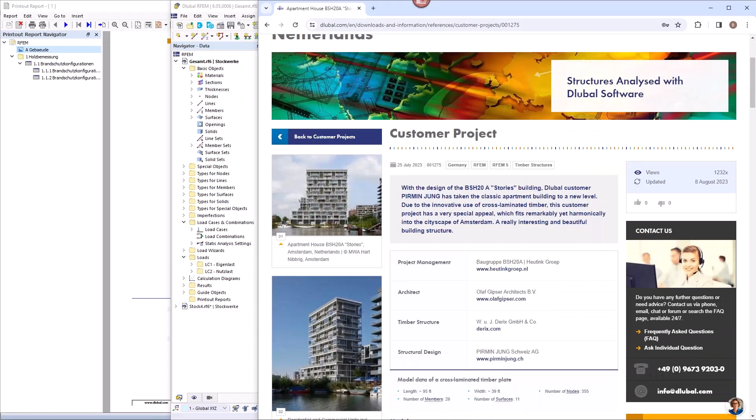The static analysis has been done by the engineering company Pirmin Jung. They're using our software, yeah, that's the key. And this is the building, 13 stories.

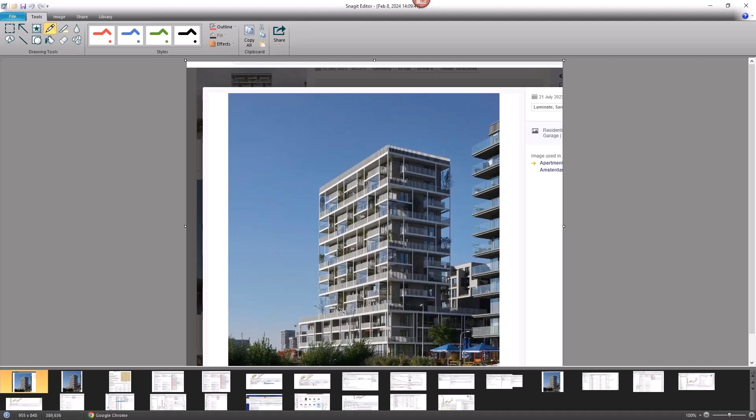The point we want to take a look on today is that there is, or what makes also the building quite interesting, is that there's a smaller part that is upon the bigger part, and we want to take a look on this story 3 here.

So how can you do this? Now you can first of all make it with model it 3D and regard all construction analysis, stages analysis, all this stuff in the 3D model, or you can model it 2D, and then you have to connect each story via the option load transfer. And this is the option that I'm choosing here today.

Today, I'm only looking for vertical deformation forces. I'm not looking for horizontal forces for the stiffening of the system. I want to do this in a separate webinar later this year. Today, only vertical deflection and vibration. So wind load and earthquake we will not consider here today.

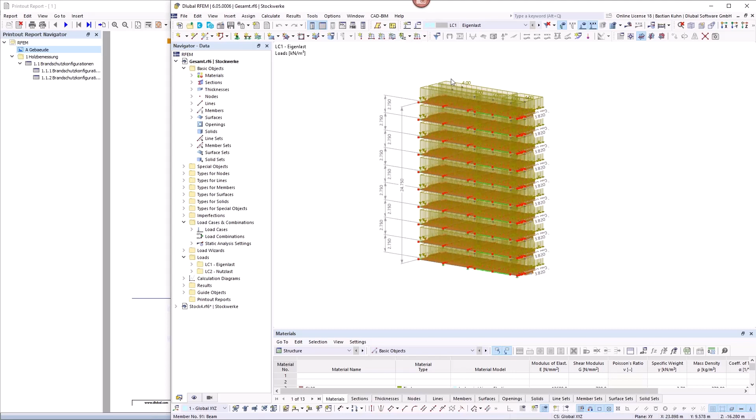As I said, I want to calculate that in a 2D structure, but with 3D effects. Therefore, just to give you an imagination of the structure, I just copied the top stories 4 to 13 in a separate position, and made a simplified load case there for the self weight, 4 kilonewton per square meter, and the live load 2.25 kilonewton per square meter in each story. Gives you approximately a height of 25 meters of the stories 4 to 13.

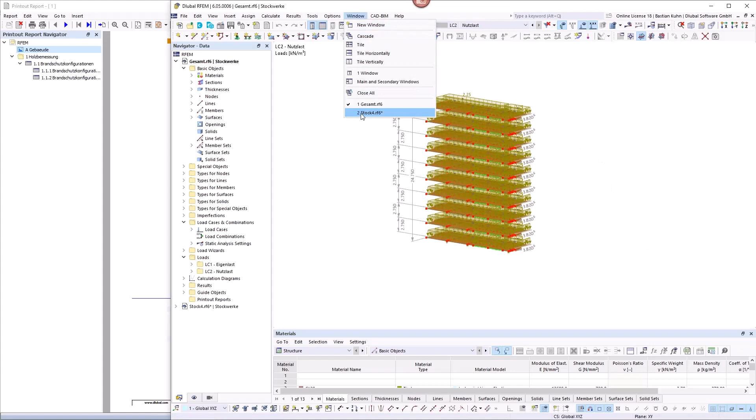And now how can you get the force from the story 13 to the story 12 and so on? Therefore, I created separate 2D positions. Here is the story 4, and I summarize them all. I want to show you that in the Windows navigator. So I have here story 4, story 5, story 6, 7, 8, 9, 10, up to 13, and connected the forces from the top story above the story 4 via the function here, import support reactions.

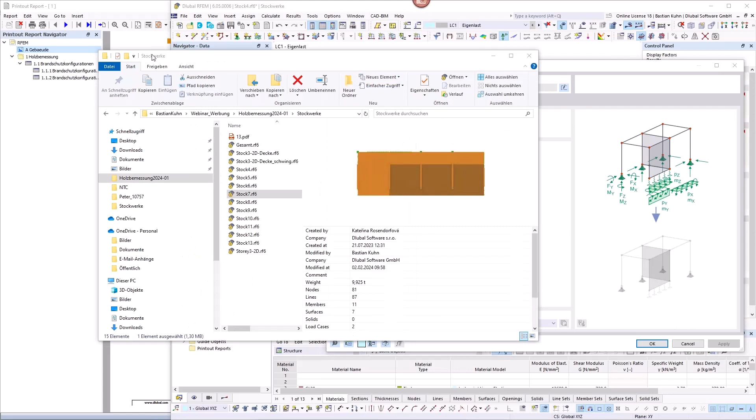Because there I can say, okay, I'm connecting the story 5 here, so the resulting forces from story 5 go into this position, story 4. And then I can say, in the model with story 5, I have support nodes, support lines, and then I'm importing them to the current model right here. And I can automatically transfer the load case from load case 1 to load case 1 in the new story, and so on. This is how it works.

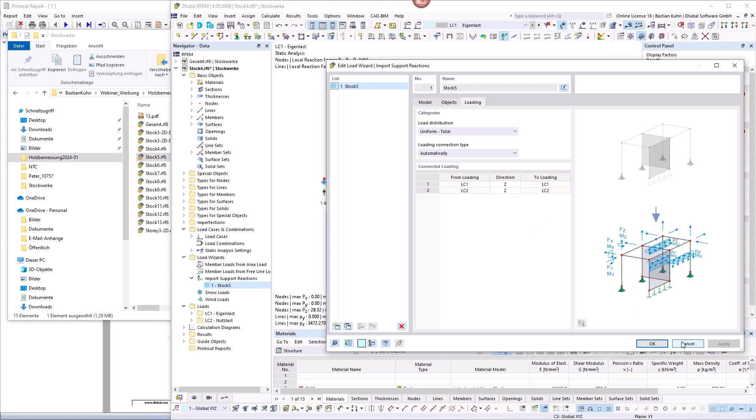I will put on the forces or the load, and here you can see that I have point loads and line loads, and if I activate it, I also have surface loads, and this is, as I told already, the 4 kilonewton per square meter for the self weight and the 2.25 for the live load.

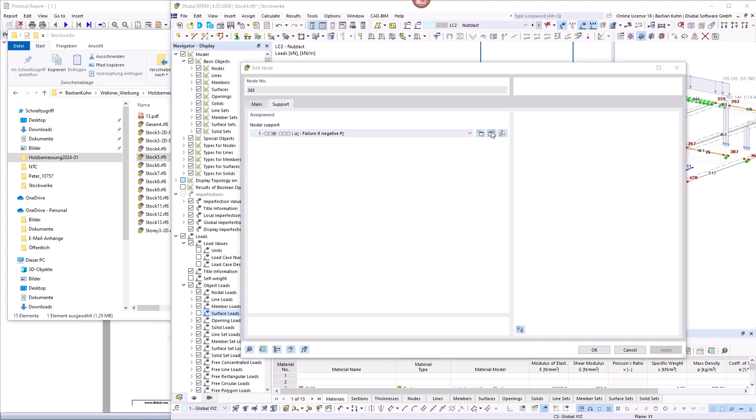We just want to concentrate on the load coming from the other stories. In this part, I also defined nonlinear nodal support behavior. It would also be possible to regard the settling or construction stage via a spring constant here. All these points would be possible to regard and still transfer the load from one story to the other.

Now when we go into the position that we want to analyze today, I think it gets much clearer, because I know it can be quite confusing, especially if you have not seen it before and did not work so often with RFEM 6 before.

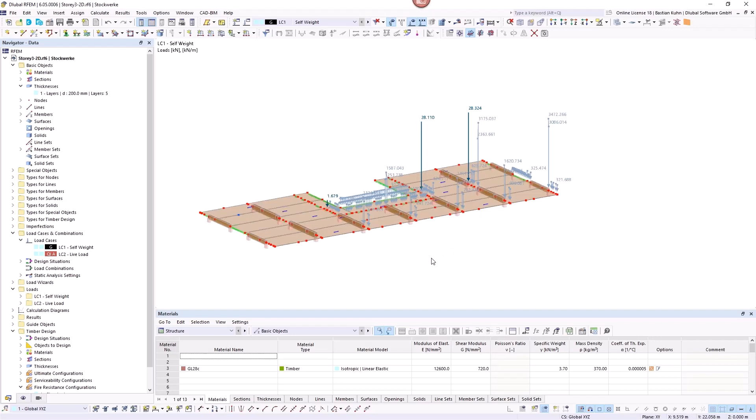You see here, I'm in load case 1, self-weight. Also, when I activated the force, in the first load case it's 4 kilonewton per square meter, and 2.25 in the second load case. These are the only two load cases I want to analyze today. I said it is a simplification today.

I think the easiest way to understand what I'm doing here is to take a look at the point load. So we have 1.68 here and 28.11 there. Now when we look at the previous model from story 4 and take a look at the reaction in load case 1, you see that I have 1.68 here, and if we turn it around, 28.11 here.

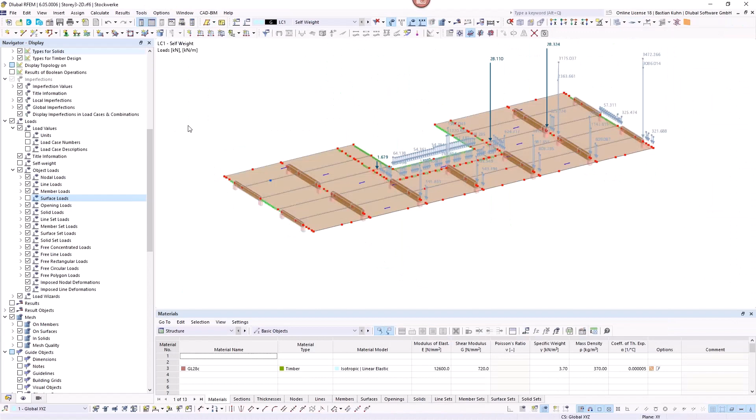So that really is the load transferred from this model into the other. Maybe we also take a look at the line load here. So 591 here, and I think that should be enough. Right here, you see also 591. So that fits. The load is correctly transferred from, I would like to say, story 4 to this part that we are analyzing here.

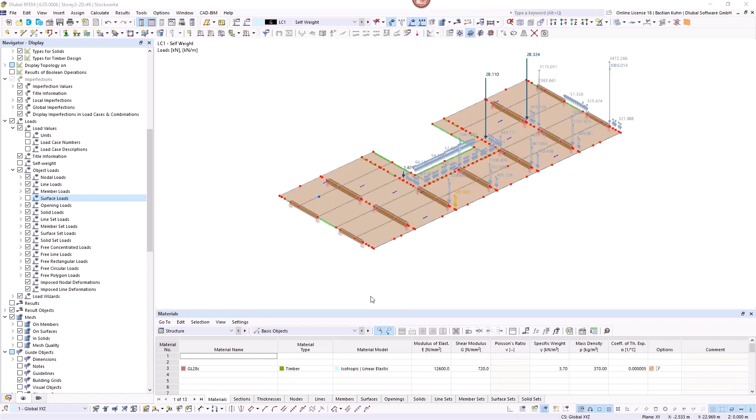Okay, to the structure itself. Now that we have such a whole bunch of questions already, it's hard for me to follow them all. All right, there they are. I would like to show you also the dimension of this structure that we are analyzing today. Therefore, I just shortly switch them on. It has a length of nearly 30 meters and a width of 12 meters.

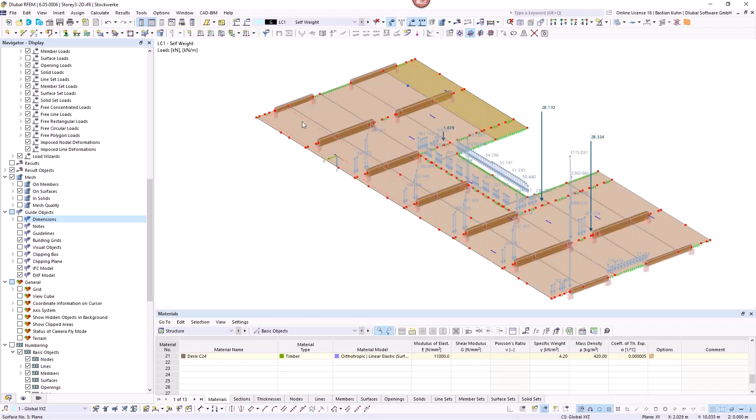I have several CLT plates in here. They are divided in an order so that they can also be produced and brought to the assembly. That's essential, that this is possible. And they are connected in between those connecting points via screws, and the screws in our software are modeled via line hinges. There's another webinar where I get into this much more detail and also use a script function in order to calculate them.

But today I just took the spring constant over from the existing project. So in X and Y direction, I defined this spring here. So that's why it's connected.

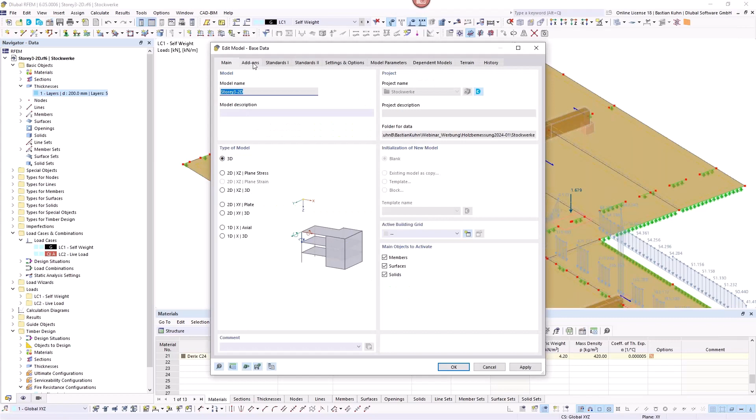The CLT plates themselves, I generated with our add-on multi-layer surface. Maybe I go a little bit into the base data here. So it will be this add-on multi-layer surface, and I'm designing all this stuff in the add-on timber design.

When I defined this layer, I have a database here with all the producers that we are offering right now. So you see, it's even possible to have a producer from Switzerland, maybe not this one, Schilliger, for example, but of course all the European producers. And if you want to design in America, North America, Canada, then you can also have producers from there.

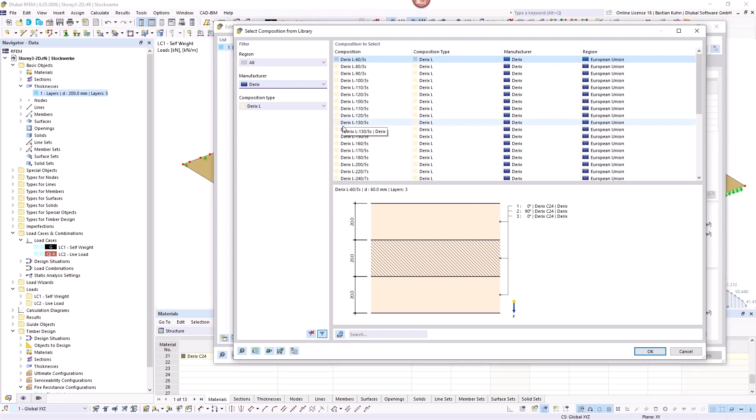Right now, here, I choose the plate from the company Derix. And this gives me a certain amount of stiffness. I have other options here to regard the failure of net sections and failure include contact surface. This is once again more for the webinar of the stiffening system for horizontal load, and I don't want to regard that today.

But what I want to show you is that these layers here will generate a stiffness that we export into RFEM. So you see that this stiffness, if we're just looking for the top bending elements here, D11 is way more stiff than D22. So the stiffness in X direction is higher than in Y. That's timber, right? Obviously, there's nothing so fancy and new.

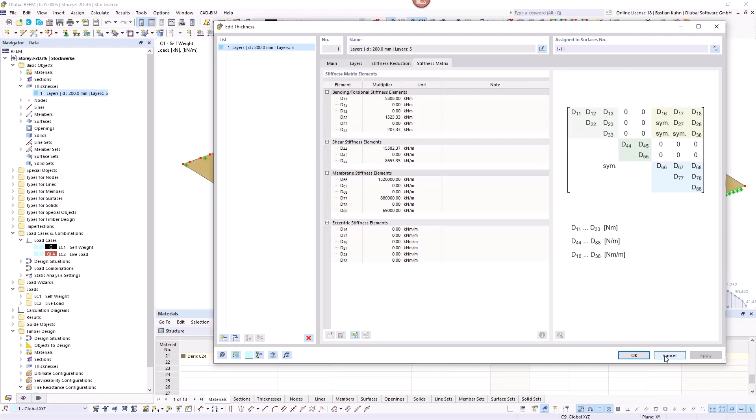But now when I'm, as a designer, working and constructing it, you probably already realized the blue arrows here. It was in previous versions always hard to know how I'm assigning the plates. If we look for the downstand beams that I have underneath those plates here, you see that there's a downstand beam supporting this plate and this plate and this one.

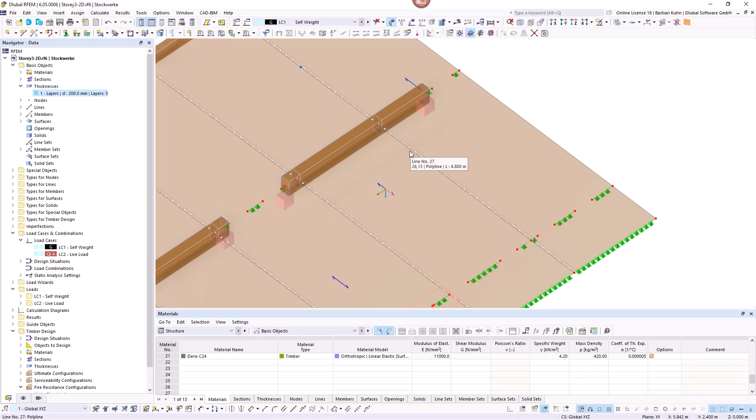Because of this connection point here, it would not be possible to design it, or economically design it, without this part. That would be quite hard. At least with screws, it can be a problem. And therefore, this beam was arranged here. It's a continuous beam from this point to this point.

And now when you want to arrange the stiffness, you probably say, okay, I have the span in global X direction. That's where I want to arrange my stiffness. So it's completely right what we did here.

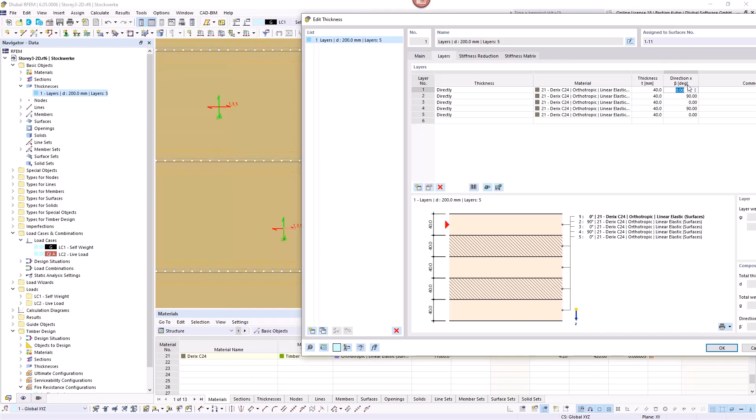And we can have it much more detailed if you want to look at each layer. I would just jump back to the thickness again. So you see my first layer is oriented at 0 degrees. The third one is at 0 degrees, and also the fifth one. This is then the red arrow here. And the soft layers of the structure, which have less stiffness, are then in this direction.

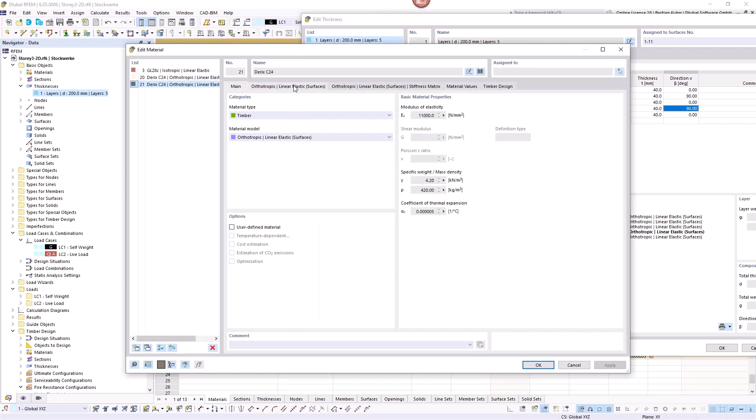So I don't want to get too detailed, but in a CLT plate you are always regarding the stiffness in X direction. And because of the orientation of 0 and 90 degrees, you still have stiffness in Y direction. You saw that in the stiffness matrix.

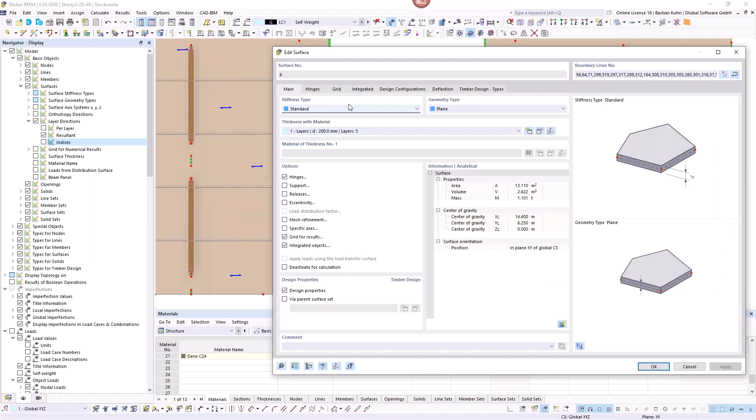So what I actually wanted to show is that you will directly get very comfortable with the stiffness direction, and then as a constructor, you can directly see, okay, here it's correct to orient it this way, but here probably not, because there I have supports completely over the whole length, and I also have supports here, and there I definitely want to change that. How can you change this?

If you assign a specific axis and define it here by 90 degrees, the whole composition is changed, and you see directly that the stiffness works.

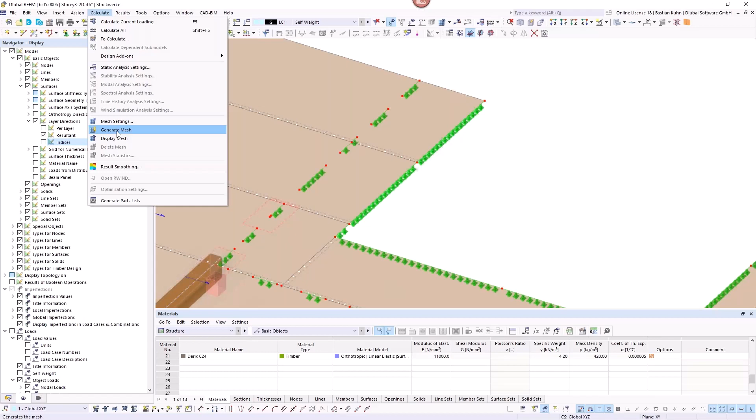All right, that is the plates. I also defined supports, just simplified, also only vertical and not movable in X and Y direction, because since we are only looking for vertical forces and deformation, this is okay. I will generate the mesh just to show you another part of what I made in this model.

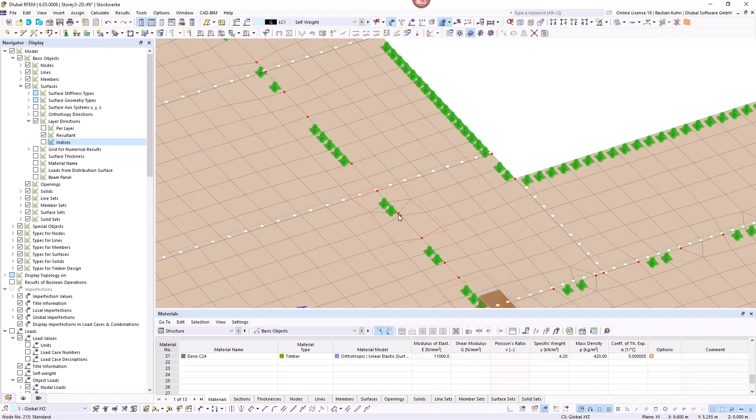I did take the whole load, once again the example of the point load of 1.68, and defined it with a tiny little eccentricity to the support. In reality, when constructing this, you probably do not assign it to this node, number 439. You would probably assign it to node 215. But I did it this way, and this will definitely give you a singularity, which will never occur in real life.

Either you can put the force directly to this node, or if the distance gets bigger, there's also the option to define a surface result adjustment. This is what I did here, and I use this surface result adjustment wherever I have these problems.

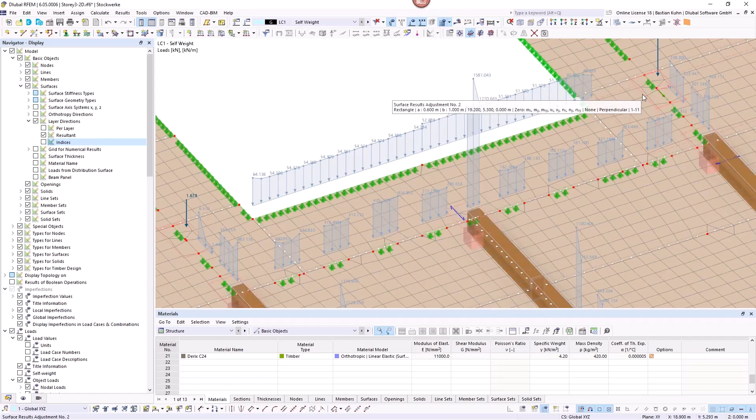I want to show you with this the advantages of this 2D system. When I have it in 3D, it could be quite a lot more work to regard it. And also when you say, okay, a downstand beam here, maybe I don't want one, this would also be easier in this position.

Okay, we switch off the load again and come to the beam forces we did. The beam is supporting the plates because they have connection points here. Otherwise it would not be possible to assemble them, or to produce them and assemble them. Both would not be possible. And of course the engineer divided the beam at these connection points.

It is not necessary with RFEM 6 to divide it, but he did it. And now, how do you regard that as a continuous beam? You will use the option member set. Okay, when we are already in member set, we can directly take a look at the design types of this beam.

We don't want to look for stability today, as we do not have any kind of buckling. And we could also argue that for lateral torsional buckling, it does not play a role here because we have constructive fixing on the top, so this will not occur.

That brings us directly to the design configuration. Well, the ultimate limit state configuration is then also not so much to do. You can consider the system strength factor. That would be something probably quite relevant in case we get right to the borders of the loading with the members. As I said, stability we do not do.

And we have also the system strength factor for the surfaces. So that's always divided into ultimate limit state and serviceability limit state in the definition of member and surfaces. It's more or less the same as what you input here.

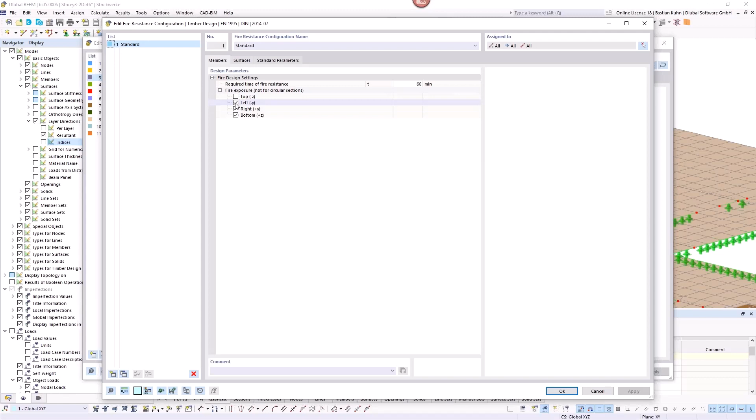Fire resistance verification configuration, that is the new point I want to show you for surfaces. Therefore I will not show that for members right now. For the member, I want a required fire resistance time of 60 minutes. And because it's covered on top by the plate, I skip that and say it's only burning left, right, and bottom, for 60 minutes - that's what I'm defining.

Then what else can we define for the beams? We can define a member support at the member start and end in this case. Here I set a support length of 30 centimeters, which is quite long.

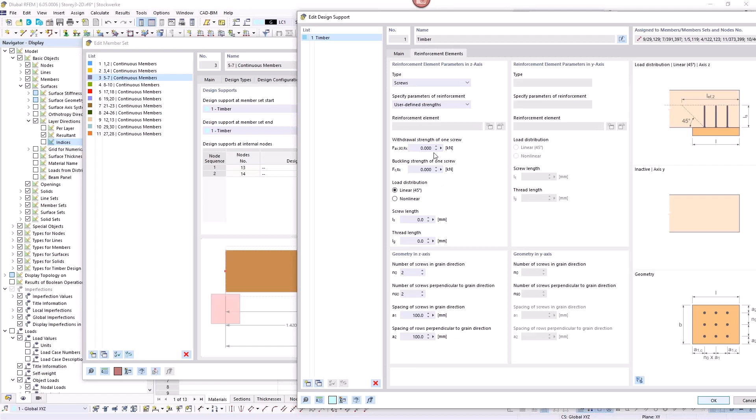Possibly you want to reduce that later on. I'm using shear force reduction that I can always activate. In case I have a shorter support length, I would maybe also want to reinforce the support via screws or with a user-defined strength. All this would be possible. And in order to regard the softwood, I can also increase the factor kc,90 by the factor 1.5.

All right, deformation is nothing I have to do much special on today. I'm just using the reference lengths. I will come to that when we look for the surfaces.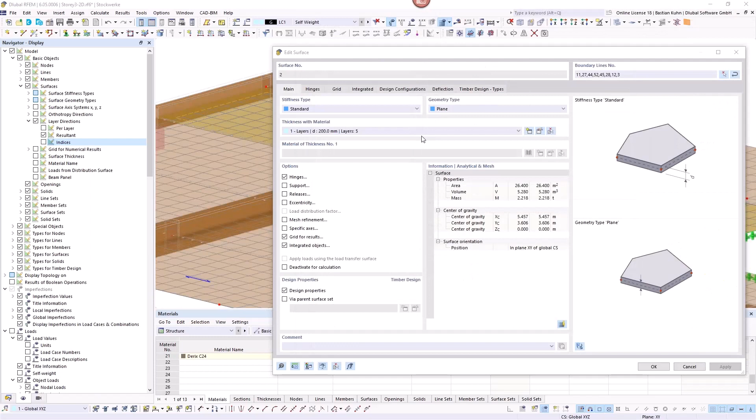And we will take this one here, this surface, and take a look for the design configurations again. The information of the thickness I showed you already, just so that you know what we are defining here. We have these reduction factors in here, which play a significant role for the design. That is all transferred into the stiffness of the structure.

Okay, ultimate limit state, serviceability limit state, I showed already. There's not much special to say to, but fire resistance. This is the main reason that we are doing this webinar here today for you, because we are really happy that we are able to regard fire resistance verification for CLT plates now, and we can regard it now correctly with correct reduced stiffness and all these points. I will come to that once we did the verification or have the verification ready.

So I'm saying I want a required time of fire resistance with 90 minutes, which is quite long. And the default setting here is non-heat-proof glue, not the glue, but the glue or adhesion of cross-laminated timber, which means this is the standard glue taken by the producers. So be aware to take this one.

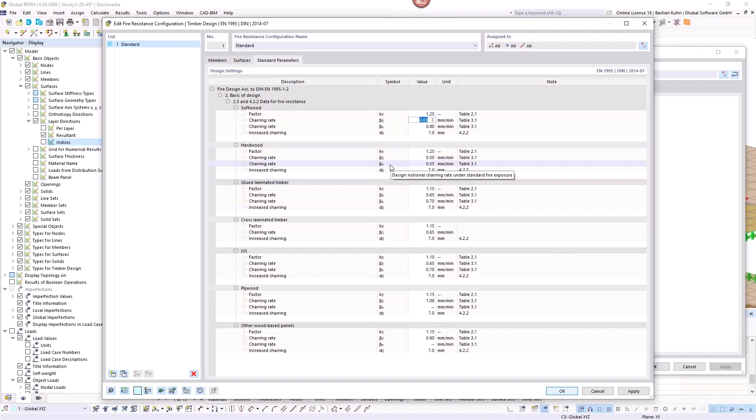And the burning rate that we have in here, we can also control that in the standard parameters, and it's probably quite interesting to take a look into that. The charring rate is for cross-laminated timber similar as for softwood, 0.65 millimeter per minute. So you say 0.65 millimeter per the first 25 millimeter thickness.

Then when one part of the structure is burned, or of the layer is burned, it comes into the area where the glue, the adhesion works, in the connection of the two boards. You have to double the rate, or maybe there are other rules where you even have to increase it. So you say not 0.65, but in this area where the glue is, you say 1.3 millimeter per minute. So that's quite a lot. And that's how it is regarded.

In case one layer of the plate is burned nearly completely, maybe we take a look to the layers again. So if you say, okay, the bottom layer here, where I am with 4 centimeters thickness, is burned completely, then of course it cannot bear any force or any stress anymore. And then there's also the rule to say, okay, when it's burned equal or less than 3 millimeters, it has to be completely skipped out of the design for the stiffness and the stress.

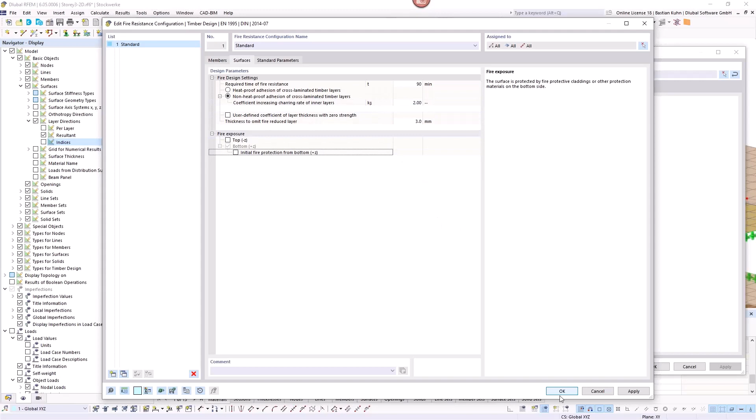Okay, but here today we say, okay, I'm working with this and we will try this one. This is the very important fire resistance, and we will do the combination, do the design, and then come definitely back to this configuration and take a look on it again.

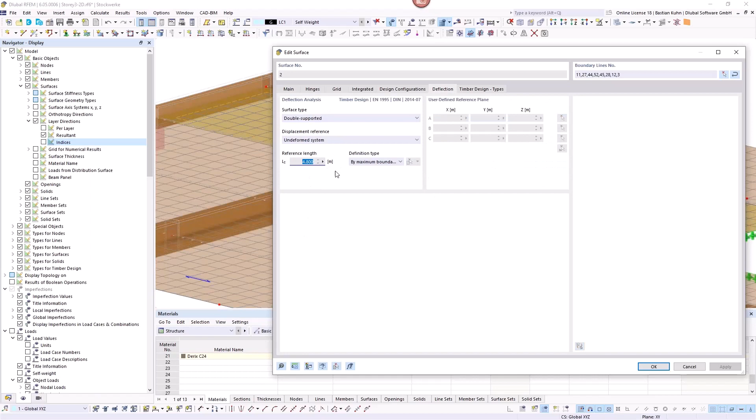Deflection was predefined with the maximum boundary length, which is all right in here. It's from this to this point, 4.8 meters. Of course, and in most cases you would want to have it, you can also select a length, but you see here this line is 4.8 meters, so you can really take it this way. Okay, and the service class is similar as for the downstand beams, 1 in this case.

All right, this is the point, and we will get to the combination. I hope I did not miss important stuff, but I don't think so. Okay, we're doing a combination according to Eurocode 5 with the German annex.

Of course, a whole bunch of other annexes are possible, and a whole bunch of standards for other countries is possible here. Once again, we have only load case 1 and 2 for sake of simplification.

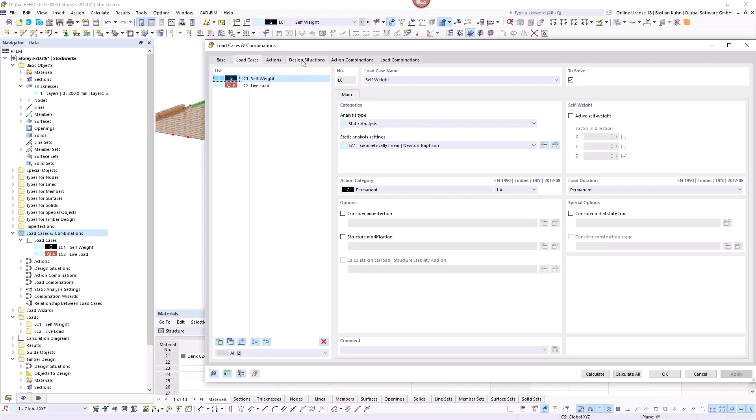The design situation is predefined with permanent for ultimate limit state, and in Germany we have 3 combinations for serviceability limit state: characteristic, which is the initial deformation of the structure, and quasi-permanent and characteristic quasi-permanent with regard to creeping. So these 2 serviceability limit state verifications will also regard creeping.

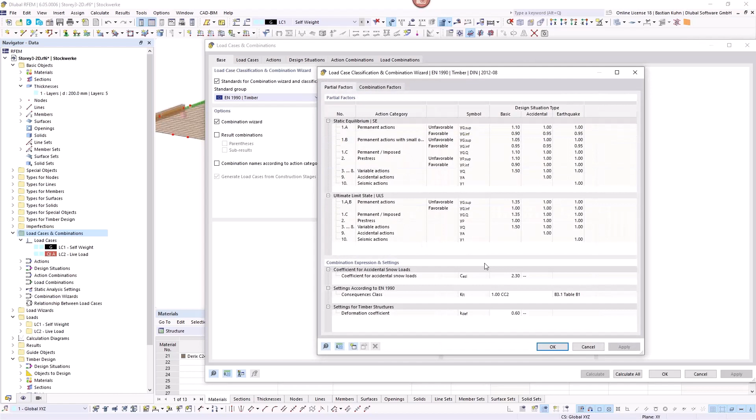The creeping you can define in the basics with settings for timber structure. In case your structure gets nonlinear, you have to regard the creeping factors in stiffness modification, but we do not have this case here. And of course, we also want to do fire resistance verification.

Therefore, once again, in Germany, it is recommended to use the accidental combination for fire with Psi1,1, which means that your factor Psi1,1 is put in front of the summation.

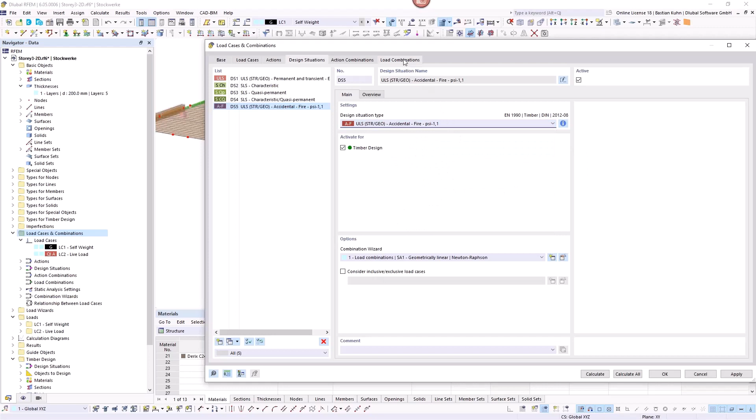But of course, it's also possible to use the other summation where you have it inside the summation. So this is the one we are using here, and then we can do our combination. Quite nice, quite short, not much to combine when you have only 2 load cases.

And then the only thing left to do is go into the timber design and say what you want to verify. We want to verify ultimate limit state and serviceability limit state, and here is correctly assigned the accidental fire.

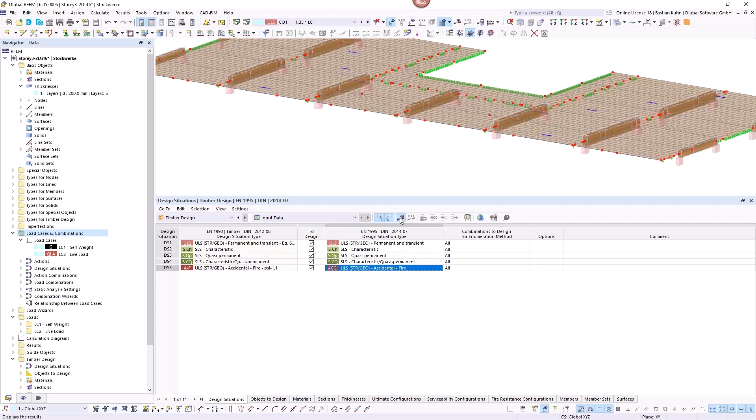Vibration we will do later on. I let the software now calculate, because this gives me the opportunity to show you the printout report a little bit more detailed. But maybe you already asked yourself, okay, it's nice that I can connect several models within one model and have the forces from all of them.

But how can I do the documentation of this? I mean, I cannot say to the other engineers I just magically have the forces somewhere here. You probably need the documentation for this, and that is what I want to show you during the calculation.

And here I'm opening again the model with story 4, and here you have an option. So for example, what you definitely want to have in your documentation is the reaction force from the story and probably a whole bunch of other parts.

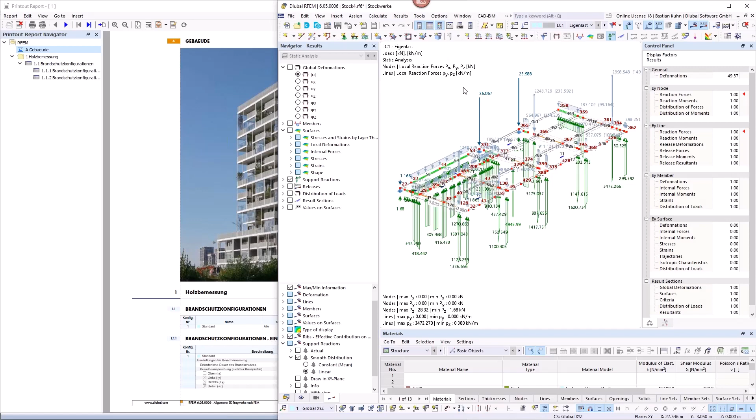But I don't have the aim to make you a complete printout report. I just want to show you how to connect several parts of the other model into this one model. Okay, so let's say we have this story 4, and once again this is connected to story 5, 6, 7, 8, to all the other stories in here.

And this is something I want to print to the clipboard. And then when I go into the printout report from the model where I'm working on, I can say, okay, this is from story 4, say okay, and have it imported.

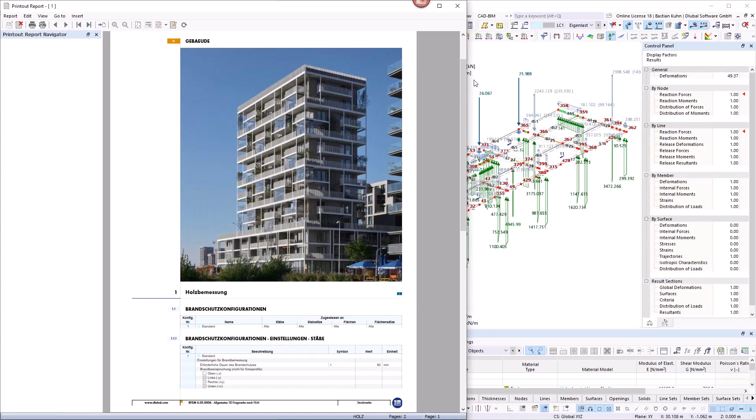Of course, right now it's not over the whole front, so this is something you always can change via right-click properties, maybe no comments, whatever. So this is all possible.

And one other point that is possible is to say, okay, I don't want to have it from another model, I want to have PDFs and unify them into one big printout report. This is also possible in here.

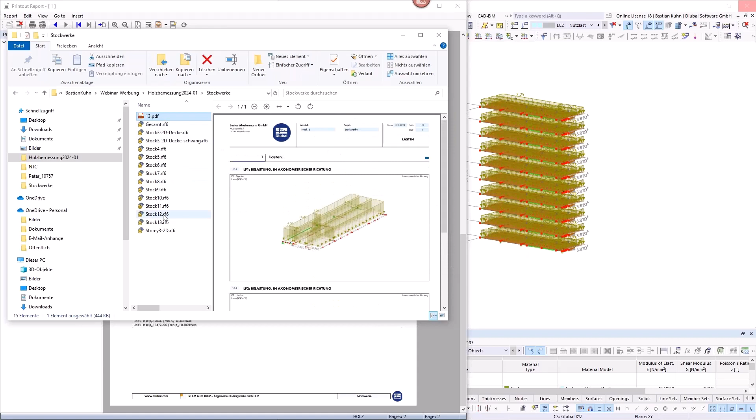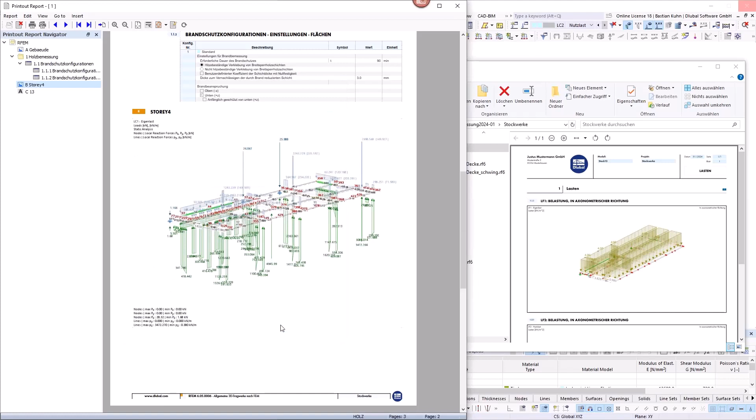For example, I'm just copying the load from story 13, so the top story in here. And when I go once again, insert PDF and select this one here, go opening, and for example, I say all pages. There is a whole bunch of options. Import it, and then I also have this PDF inside it.

Okay, these are the options we have for the printout report. Maybe I don't want to take a too detailed look into the printout report, but of course, when you go into the settings of it, you have all options to, for example, regard the fire resistance configuration.

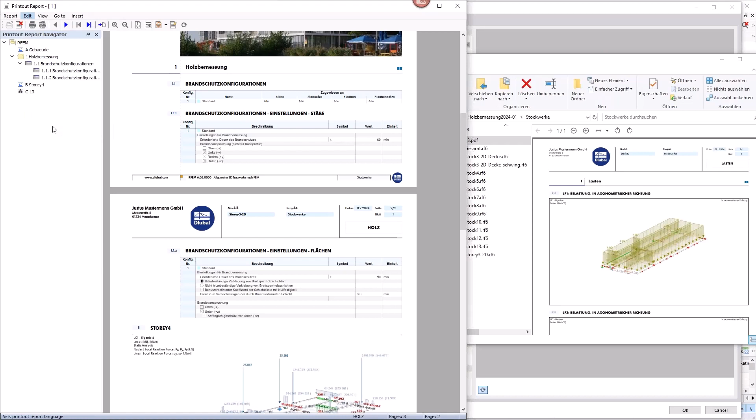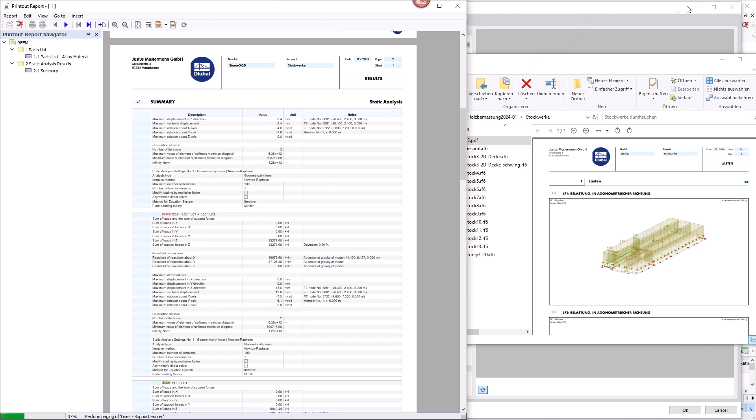Oh sorry, this is in German, oh this was my fault. Once again, so we probably should change the language into English. But this is also possible, similar to the software, it's also possible to change the language. Okay, yeah, so here you see, now it's there, and we have the language in English. So it's also possible, okay, so that we don't need.

I think the calculation is now ready, yes, so that's fine. Oh, now this is loading all the points to the printout report. That was maybe not the smartest way of doing it, I should have left that.

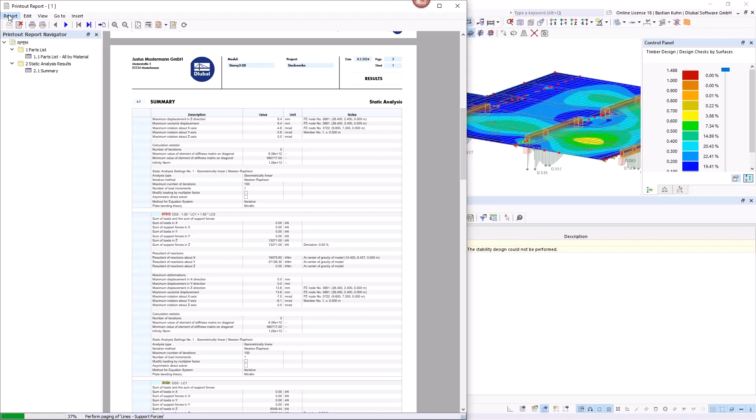Okay, but we can maybe wait a few seconds. Now it's ready. Because it's loading all the stuff into the printout report that I should have skipped. Okay, so the design of the structure is ready.

And the overview at first says, yeah, not really a bigger problem. When we look for the design ratios on the member, that looks quite okay in here. We can also take a look on it graphically.

Maybe we take a look at the biggest loading for ultimate limit state. This is the bending. We can also take a look at the compression, just to have an example or an imagination. So you see, 50% loaded. The length is definitely too long that I chose in here.

And maybe we can also decrease the size of the section. Anyway, here's the pressure support verification done, and you have an equation that you can put also to the printout report, to have a nice documentation of it.

Okay, serviceability limit state without the vibration is also not really a problem in here.

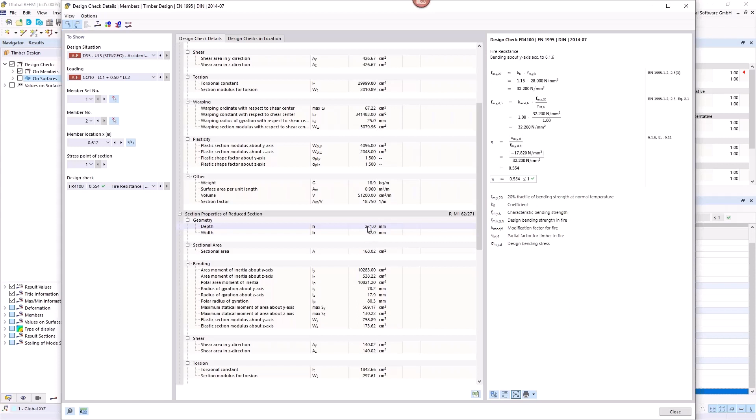And fire resistance, we also take the biggest loaded beam. Because I think it's always interesting to see how this is done. So the original height was 32 centimeters with a width of 16 centimeters. And because of my burning rates and fire exposure on the sides, it is reduced to 6.2 centimeters and a height of 27.1. Then the verification for bending is done again with this reduced section.

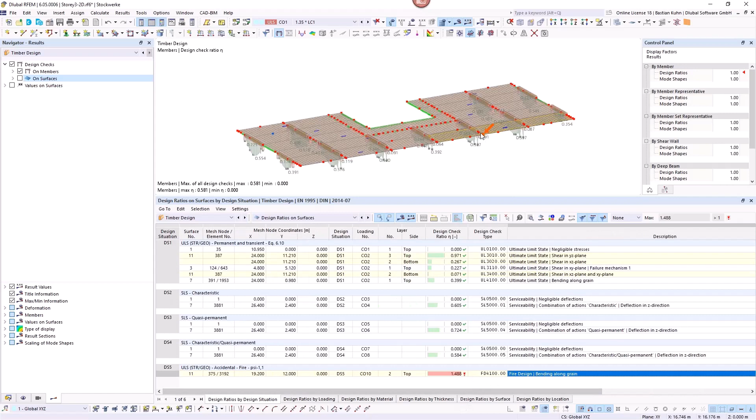Okay, that's the beams. Now we will jump to the surfaces. And here you see already, the fire resistance doesn't look really so nice in here. I mean, it's only a small part of the structure. Hold on, we will get the graphics on again because I skipped that.

There can also be defined an average region or a surface result adjustment, just like I did in this part here. That would definitely be possible. And I'd say 20-30% is something that is probably possible to have it, at least if it's such a tiny high peak in here. It's something you can always do, but I want to try something different in here.

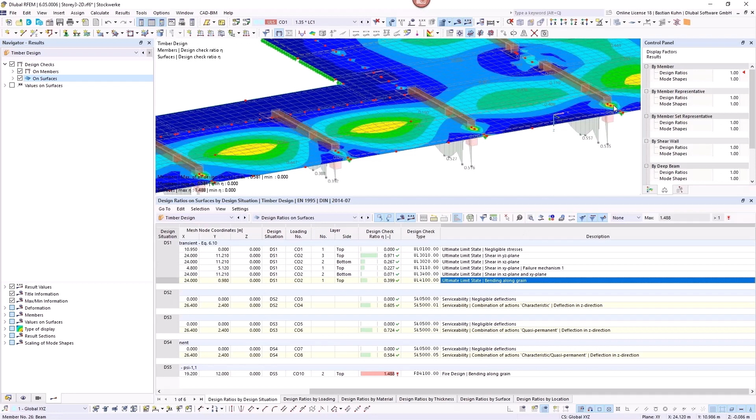Before we do that, we take also a look at the other loadings inside here. Yeah, the shear for the punching through area is design giving in here on this part. That's the usual punching through area what you want to take a look on.

And we can maybe also take a look at the stress over the whole section, because I think that's always nice to see. And you see for the bending, how the stress is transferred into each layer of our section or surface.

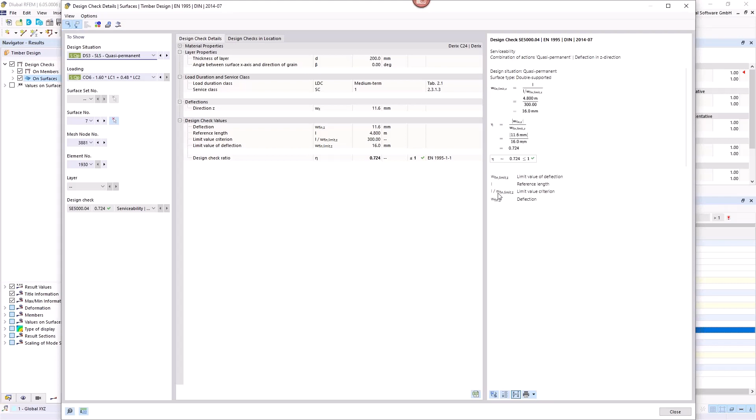Okay, serviceability, that's just deflection. We can take a look also on the details, but I want to show you that via the vibration analysis later on. You see, it's just that we take the limit deformation of 16 millimeters and use this for dividing the existing deformation in this serviceability state.

And that brings us to the fire resistance, where we have this high overloading. Okay, there it's quite interesting when we look at the result diagram that I showed you for the ultimate limit state before, because now you see our intelligence behind it.

You see, because of the burning, the fifth and the fourth layer is burned completely. And this is not only for the stress, but also for the stiffness. The stiffness matrix that I showed is reduced for the load combination 9 and 10.

And yeah, you see, of course, now I have only one layer in here taking stress, because these other ones have, in this direction where I'm looking at the stiffness, zero. So that's, of course, the worst case that could happen.

So 90 minutes with this glue that I'm using here, it will never work, I think. So that's just quite too ambitious what I tried. Nevertheless, before we change something, we will...

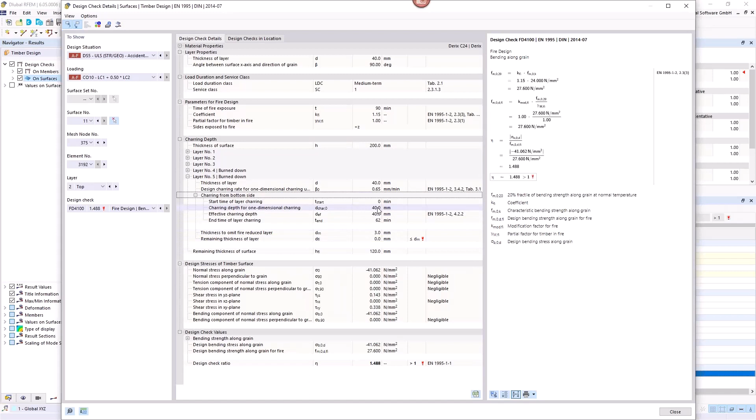use it again in here and take a look at the charring depths inside. So layer 5, I told that already, it is burned completely. Of course, by 90 minutes, there's nothing to talk about. But layer 4 can be quite interesting, because you see, I usually had a remaining thickness of the layer of 2 millimeters, but because of this rule that I just showed you,

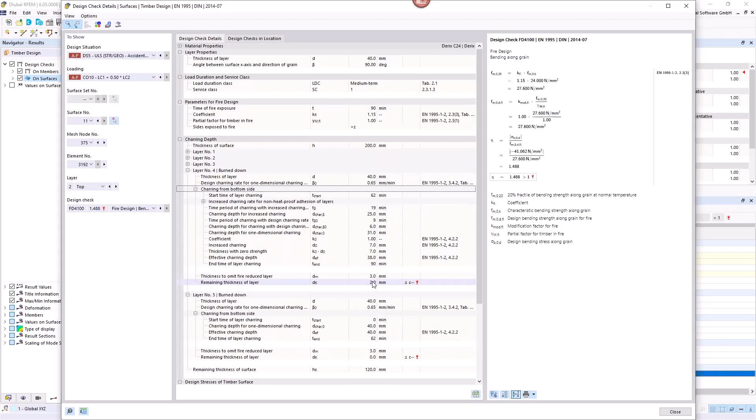it is burned completely now. It has no more bearing capacity. So it's defined to zero.

Okay, yeah, you probably expected what I'm doing now, because I introduced that a long time ago. The easiest way to increase this now is to use a heat-proof adhesion of cross-laminated layers, because now I don't have to double the burning rates.

And you probably saw it tells me that it needs to delete the combinations 9 and 10. Why is this necessary? Because the stiffness in combination 9 and 10 is also reduced by this new charring rate. So we have to export the stiffness matrix for this combination back again into the program, get the inner forces, and calculate it again.

And hopefully now we cross our fingers. We hope that it will work.

Okay, it should usually not take that long, because we only have these two combinations, and also for the timber verification, it's just in brackets the fire resistance where we need to do the stress analysis again. Still, I know there are a lot of parts to be verified.

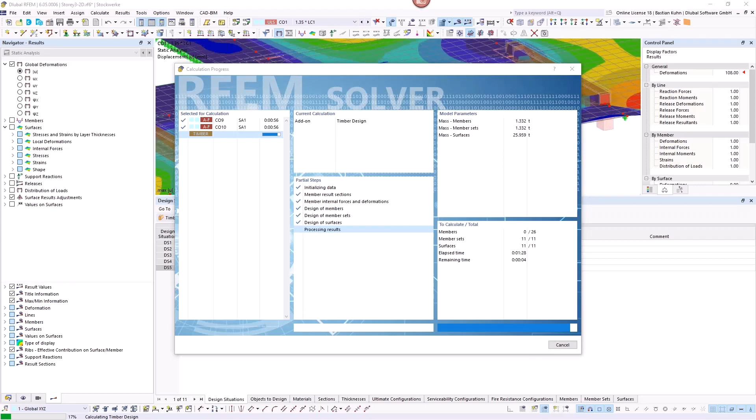And there we are already. I'm just scrolling through the questions, but Gerhard answered them all, and there's not really much questions coming doubled. What can we take a separate look on? No, I can't really see it. Okay, but there we have it. I would have shown something else, but now we have the results.

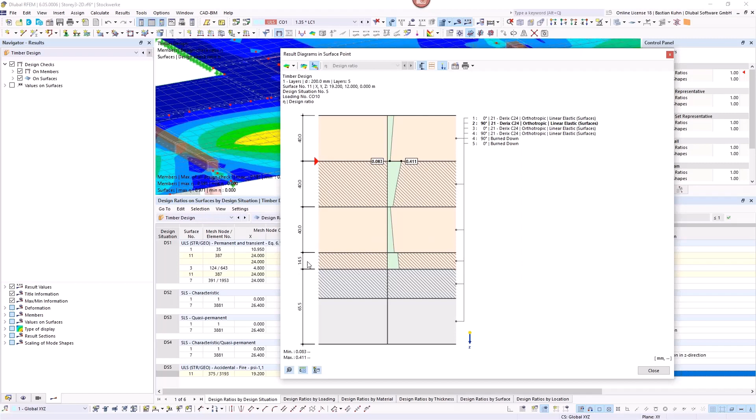And then we directly jump into the surfaces and look at the fire resistance. And yeah, perfect—you see, I have nearly 100% less loading on the structure, just because of this better glue that I'm using. And now we can also take a look at this graphic again, and you see already 14.5 millimeters do remain.

And when we take a look at the stress, this bottom layer here gives me so much more load bearing capacity that it's just the smartest way to do it, for me. In the details you will definitely see the same when you go to charring depths, and then you see here that this is still working. So once again, this is really a big jump.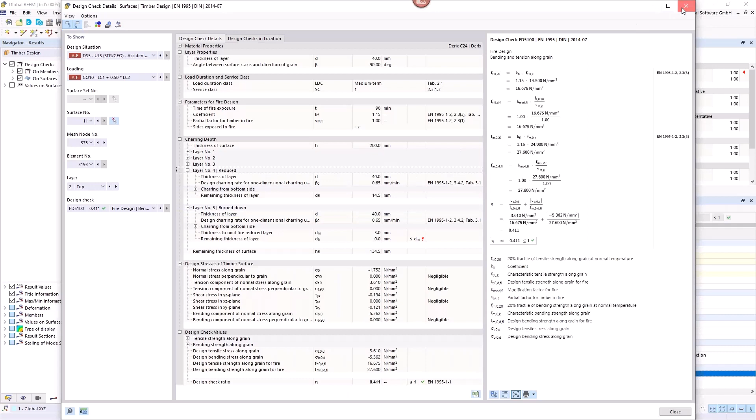I don't know a software out there that is calculating 2D surface elements, assigning a fire resistance verification by also reducing the stiffness. I mean, there's probably some software that will reduce or have the reduced section, but they will not reduce the stiffness. And it's quite important if you look for the effects that it has here.

So that is what we are very proud of, that we have it in our software now, and I think it's one of the best things you can have. Okay, this—and now was only missing the vibration analysis.

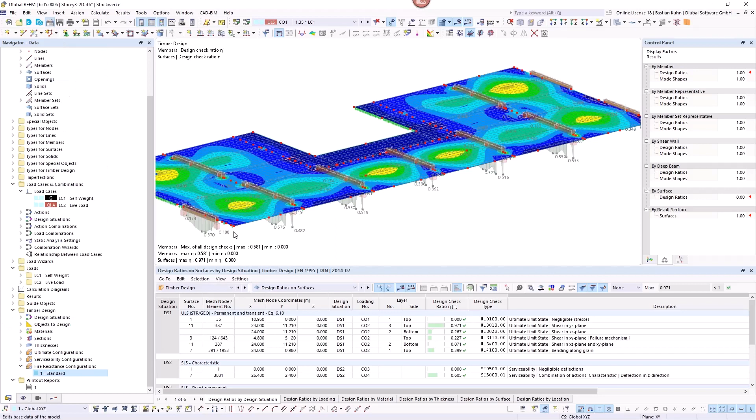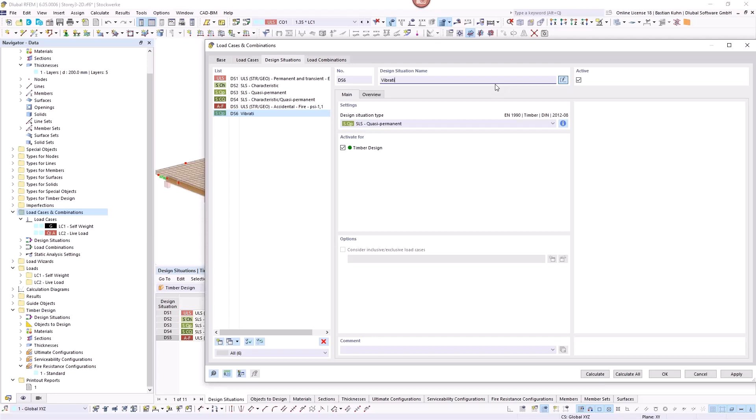I want to show you the simplified vibration analysis as a first step. Therefore, I'm shutting off the combination wizard and will just define one more additional design situation for vibration, and have in the load combination also one more load case that I'm assigning to this, with 100% of the self weight and 30% of the live load.

And I don't think you want to see the calculation again for all the other objects to design, so I'm just doing the simplified vibration analysis again. You see, now I have only one combination and only deflection that I'm showing here, so that would be quite good and quick—that's the point I want to have here.

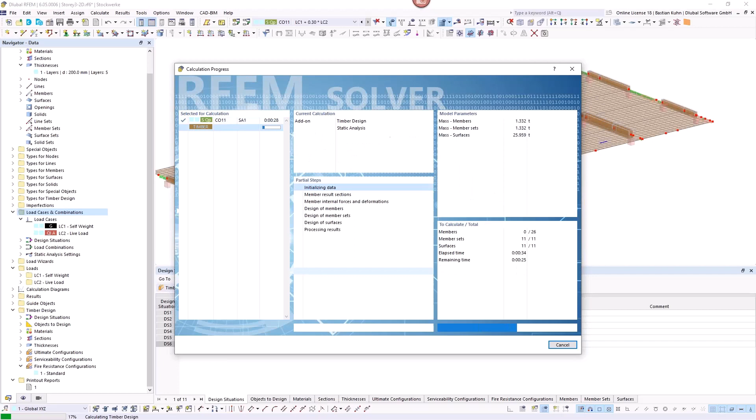The simplified vibration analysis is similar to the SLS verification—it's looking where the biggest deformation is, and this is divided by the limit deformation of 5 millimeters. I showed it to you in the configuration settings, and you see everything's red. That's not nice.

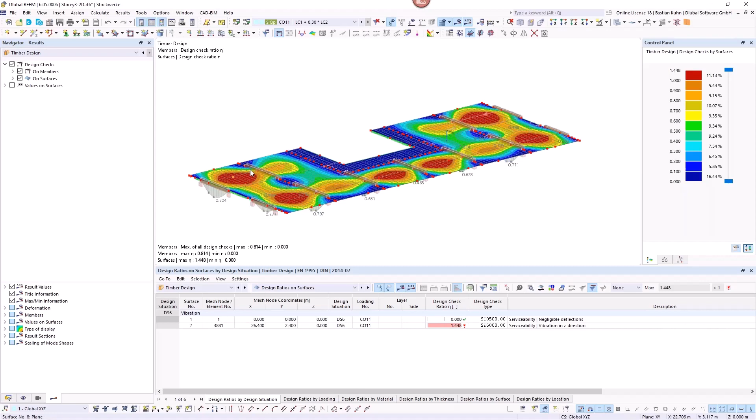If you look at the members, there's not really a problem here, but of course for the surfaces in this area and in this area, you have the biggest overloading—44.8% overloading of it. Now, how can you address that?

There are several ways how to do this. What we here in Germany do most of the time is the analysis by the so-called Hamm-Richter method. What does that mean? It means that we are calculating the frequencies of the structure.

Therefore, I'm assigning a new load case and giving it the analysis type modal analysis, and importing load case 1 as a mass here. And I need another load case for the stiffness criteria. This is the way how this is done.

I will just show you what it means. So when we look at the modal analysis in load case 3, we will calculate the frequency, or the hertz rates, of the structure.

And now, in this method, there is a rule that when you are in independent structures, you should be above a hertz rate of 8. And when you are in dependent areas, so when your own family is introducing the frequency, you should be over 6 hertz. Okay, so that worked for the second rule, but not for the first one.

So you have two ways to do it. You can either get it stiffer, but it's not really in this problematic part—it's more in this part here where you can try to arrange something. But if you argue, okay, I have maybe a dependent area here, it is fulfilled here. At least it is not 44.8% overloaded.

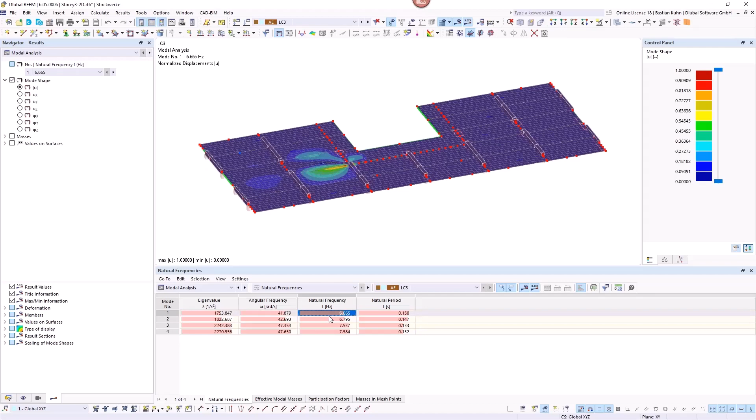And now the second criteria is the stiffness criteria. Therefore, in the maximal deformed part, you have to define a force, a single force of 2 kilonewton, and it should be below the deformation level of 1 millimeter. And when this is fulfilled, your verification is done.

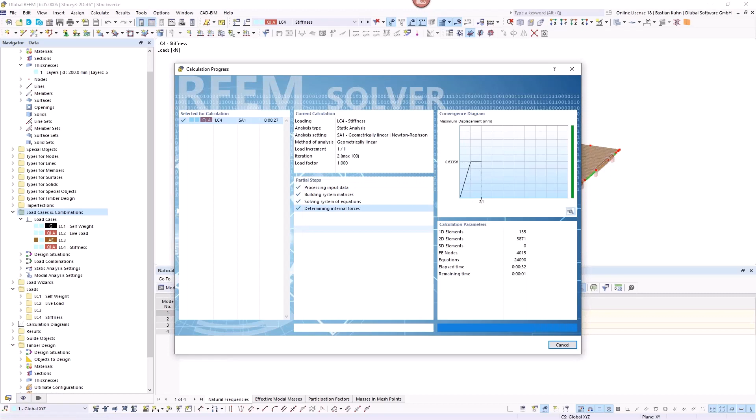It requires that you have an option to calculate the frequency rate, and this method can be even more sophisticated than what I'm showing here. It would also be possible to analyze this with our software, but there you have to define a vibration on the structure and see how the damping works. As with these rules we are below the level of 1 millimeter, you can argue that the vibration criterion is fulfilled and that it's okay.

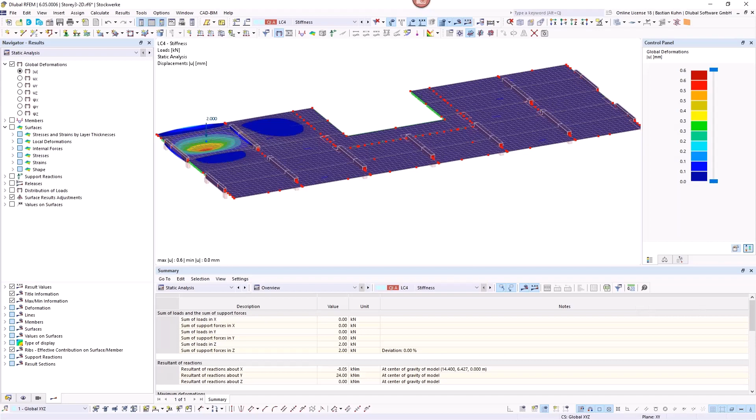Just as an option, because the simplified approach is really simplified. That's in the nature of such things. Okay, I see everything's answered, that's always good.

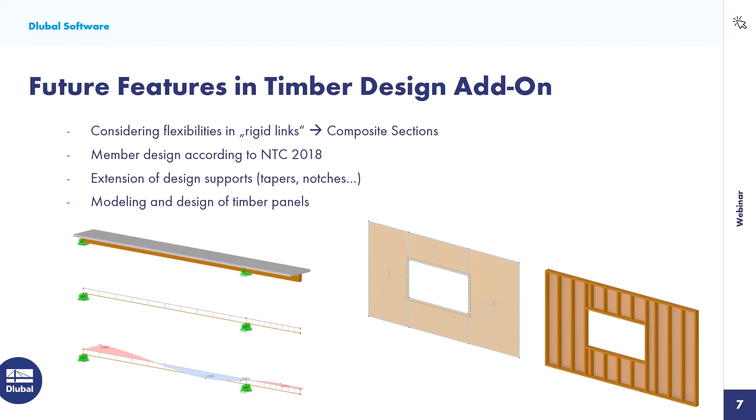This is the forecast for the next year, I would say, and let's see - just to inform you, and hopefully it will help you. Okay, Bastian, thank you and goodbye from my side.